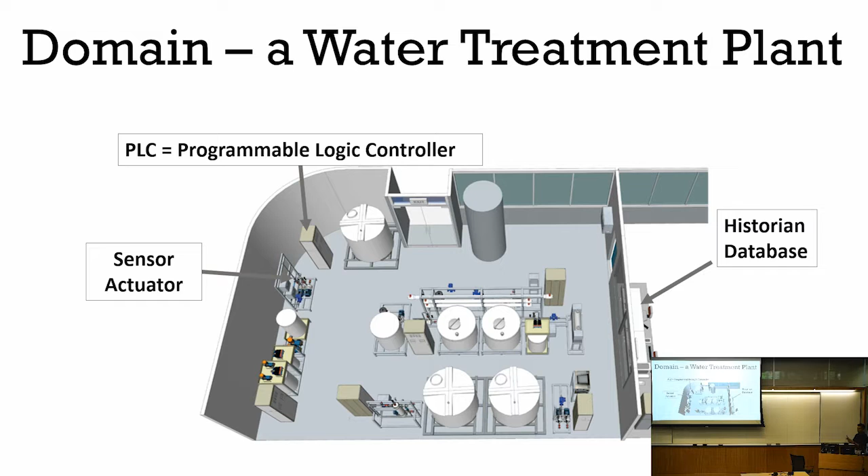So for example, the pump should turn on if the water level is low. This is a sequential style of programming called ladder logic, in which every step has to happen in sequence. So these things control sensors and actuators. They get the data from the sensors, they estimate the state of the plant, then they control the processes using the actuators. So the architecture is somewhat like this.

You have a physical process which is estimated by the sensor. Then the PLC reads the sensor readings, then the PLC tells the actuator what to do, and it impacts the physical process. So the good thing about these PLCs is that they're localized to the stage in which they operate.

So if you have 6 stages, let's say ultrafiltration, dechlorination, and all these different stages in a water plant, every stage will have its own local computer deciding its own local actions. All of these computers are connected to a centralized computer called the Supervisory Control and Data Acquisition Unit, or the SCADA system. So these blue stars indicate that all of these points are prone to attack.

So what we did at the lab is we put defense mechanisms at each of these points. One of the things I'll be demonstrating is how to visualize defense and how to visualize attacks. So for example, these are the electrical wires that go from the sensors to the PLC.

So we went a step ahead of all the things that are out in the industry, and we captured the electrical current and voltage signals, and we assumed that a hacker cannot get to the electrical and voltage signals part because they typically focus on the network part. They get in through the network. So we capture data from all these different levels, and we have the most accurate state of the plant.

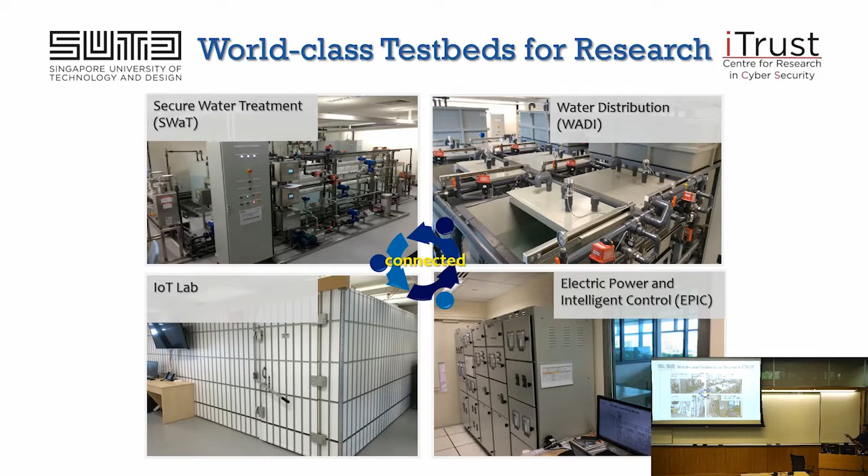So I'm just coming from Kansas City in the Department of Homeland Security's conference on industrial control systems. They are trying to build a similar setup for all 16 critical infrastructure sectors. And like Japan seems to be doing the same thing. We did this about 6 years back.

So we have a lot of collaborations around the world, and some of the best time series data sets that you can get for real physical processes, which many people have requested for, and they use it for testing their control systems methods or formal methods or computer science methods to detect attacks.

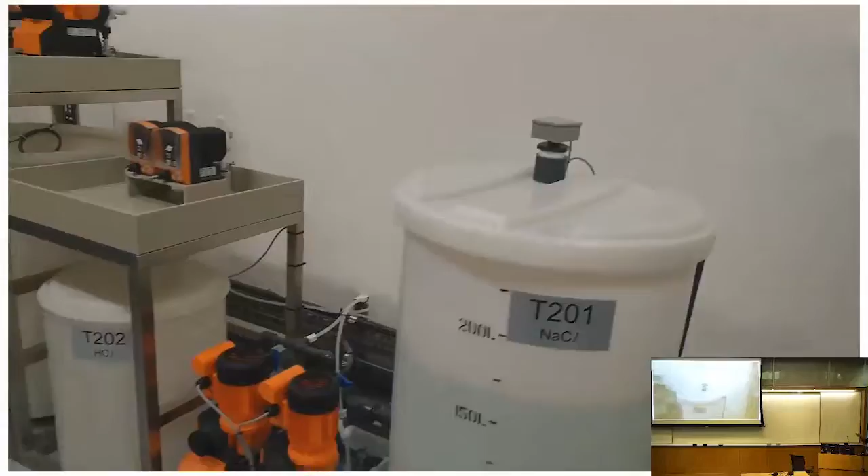So this is just a quick tour of the lab. This is one of the stages. Then you go to the raw water stage. So you can see these are the programmable logic controllers. They are always redundant. Then we have installed different projects at different stages. So you have 6 stages in a room as big as this, and this is just one of the testbeds of the 4 that I showed you.

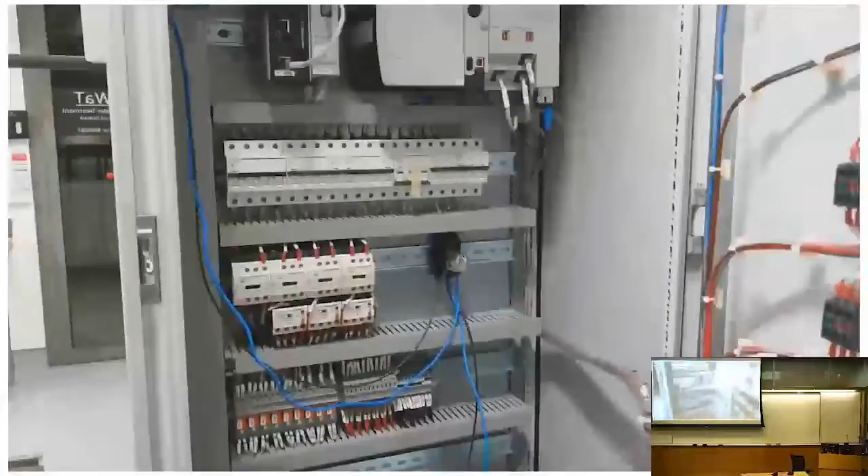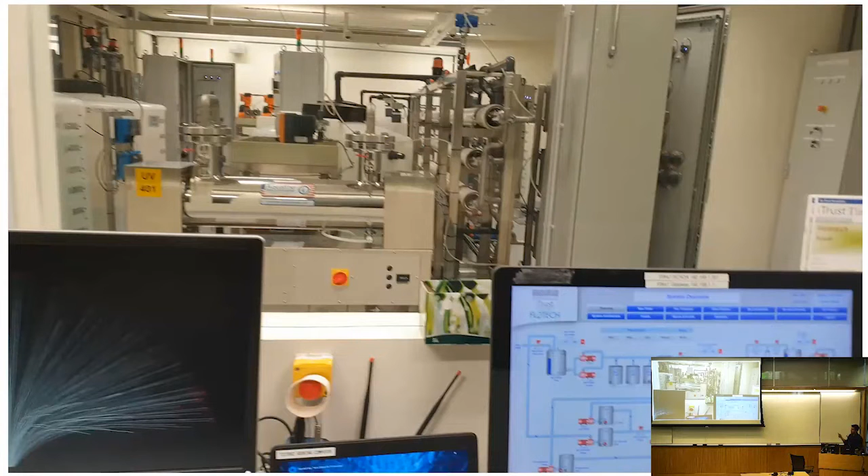And I'll be giving you a closer look very soon. So I want to tell you how the world interacts with this. So you see the screen.

The operator just operates it using a traditional mouse and keyboard or touch screen. And the thing about these interfaces is that they are hard coded by the vendor, and they are frozen at the release time of the plant. So they do not have any way to visualize attacks on the system, or if something is under attack, or any defense mechanisms of the system. All they tell you is the value that the database is seeing. So if that value is corrupted or hacked, then you have no way of telling what state the plant is under.

So what hackers typically do is they get remote desktop access to this particular interface, and that's how they usually attack the plant. So how they achieve that is they send a phishing email to the operator, or they infect their thumb drives with some virus, which is how the Stuxnet attack also happened, if people in this room are aware of that. So now I'll just show you a quick demo.

So what I have here is an Oculus Rift headset. So my position will be tracked by these two sensors here, and I'll have all the degrees of freedom for my hand using these touch controllers.

So you will be seeing a very narrow view of what I will be seeing. So I urge you to try out the demo, because virtual reality is in 360 degrees and 3D, and what you are seeing is a 2D screen with a very narrow field of view. So you won't be appreciating it as you would when you try this headset out.

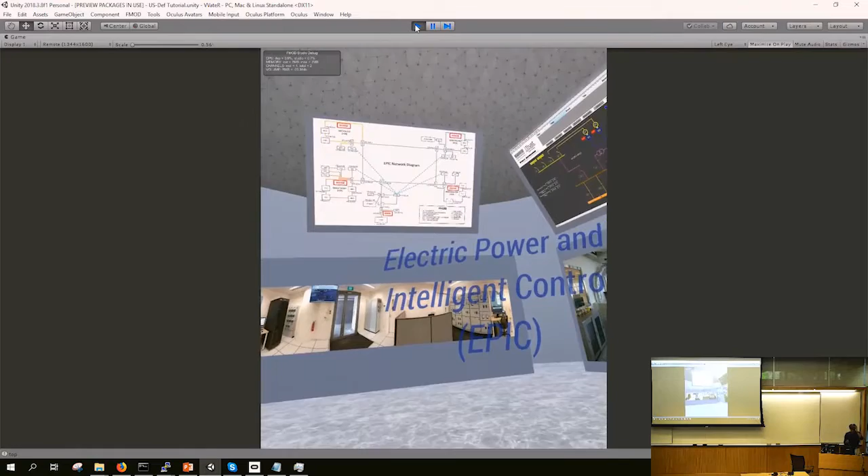Hi, welcome to iTrust. Our research focuses on the development of advanced tools and methodologies to ensure the security and safety of current and future systems in 5 key areas: cyber-physical systems, or CPS, Internet of Things, or IoT systems, enterprise...

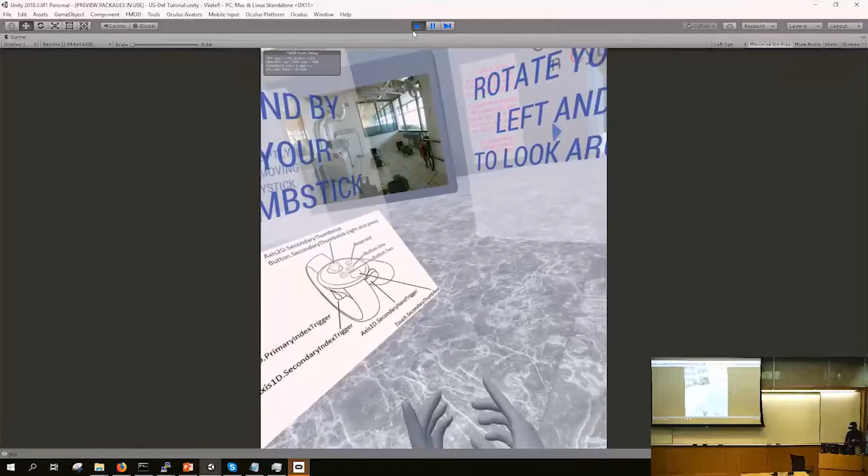Hi, welcome to iTrust. Our research focuses on the development of advanced tools and methodologies to ensure the security and safety of current and future systems in 5 key areas: cyber-physical systems or CPS, Internet of Things or IoT systems, enterprise networks, autonomous vehicles, and blockchain.

So yeah, this is a digital tour of my lab, and this was just an introduction. I'll walk you through my lab. So you see my hands here, and you see that I can make all kinds of gestures here for different actions. So let's just walk through the lab.

We have the following test beds for representing different critical infrastructures: SWaT, Secure Water Treatment Testbed; WADI, Water Distribution; and EPIC, Electric Power and Intelligent Control.

I'm Aditya, and I'll guide you through this entire journey. Follow the blue arrow and complete the objective to move on to the next stage of the tutorial.

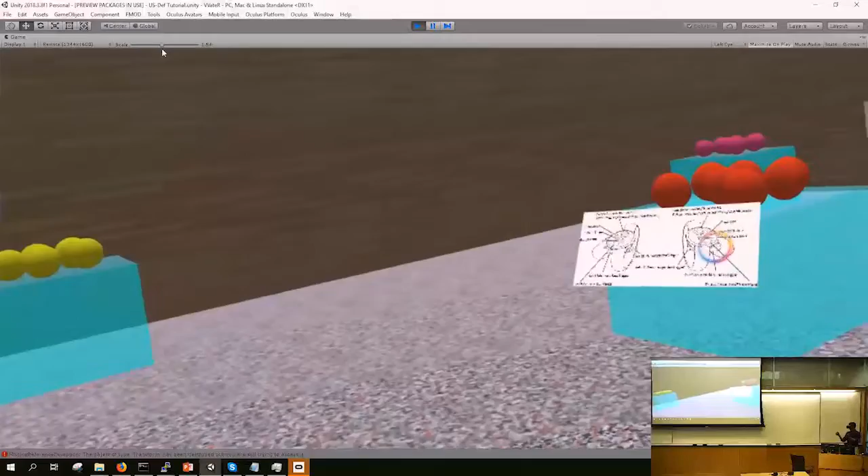So let's start with the different interactions you can perform with your controllers. Follow the signs to complete the objectives.

So this is just a place where people who use VR for the first time can just play and see that we can modify physics as we want. So in this case, we don't have gravity as soon as you touch the ball. So this is just a place to familiarize the person with the virtual reality environment.

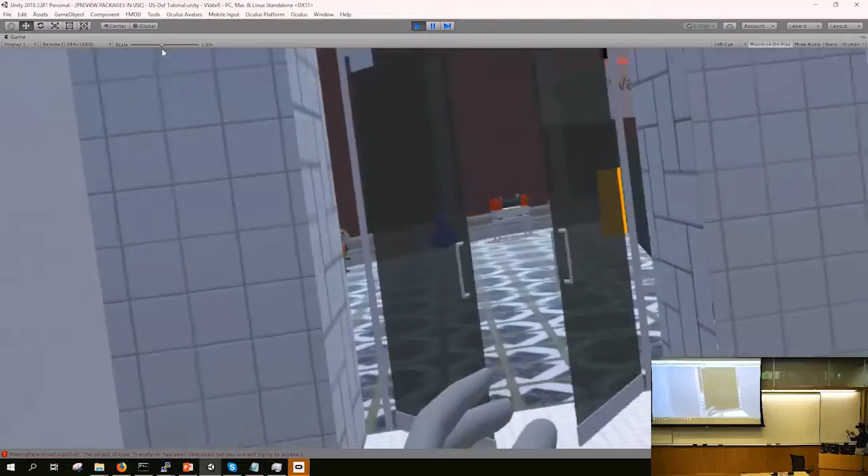Great job! Now let's show you what SWaT looks like. All of these components combine to accomplish individual tasks and hence are divided into stages. Take a good look at them.

So you have all kinds of freedom. So I can move around if I had more space, and you will move around in the VR environment as well. I can squat if I want to, and you can focus on particular components. So these are all the different sensors and actuators we use in the lab.

So the ultraviolet module and the pressure indicator. P1 supply and storage. These are the P2 stages, pre-treatment. P3 ultrafiltration and backwash. P4 dechlorination system. P5 reverse osmosis, or RO. P6 RO permeate transfer, UF backwash and cleaning.

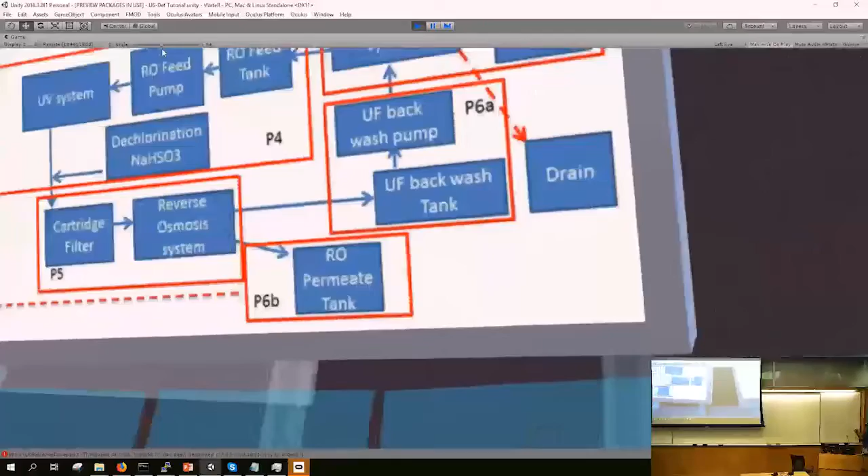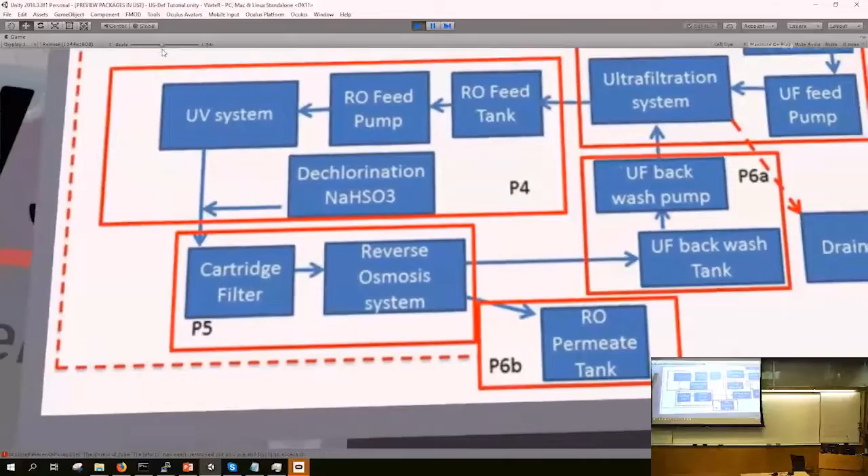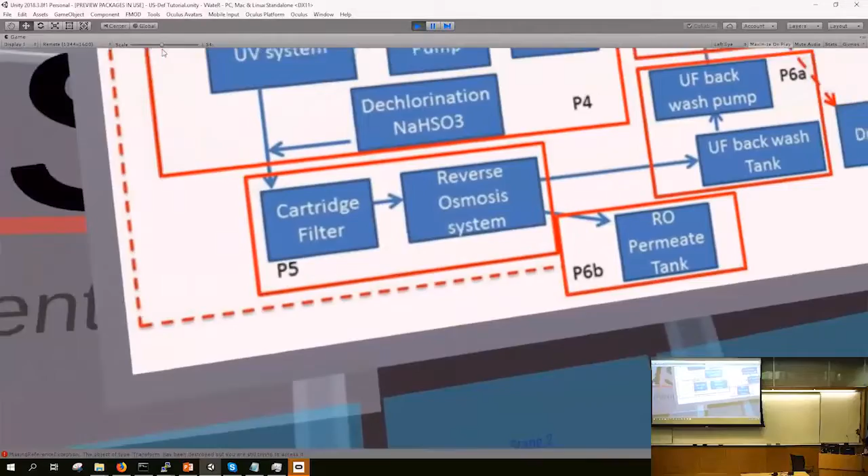So that's the network architecture of the lab. Now SWaT consists of a modern 6-stage process. The process begins by taking in raw water, adding necessary chemicals to it, filtering it via an ultrafiltration or UF system, dechlorinating it using ultraviolet UV lamps, and then feeding it to a reverse osmosis or RO system. A backwash process cleans the membranes in UF using the water produced by RO.

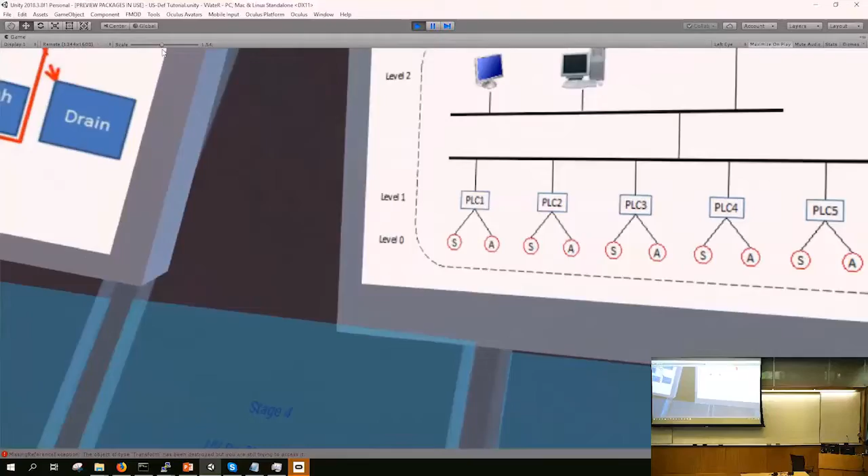The cyber portion of SWaT consists of a layered communications network, programmable logic controllers or PLCs, human-machine interfaces or HMIs, supervisory control and data acquisition or SCADA workstation, and a historian. Data from sensors is available to the SCADA workstation and is recorded at the historian for subsequent analysis.

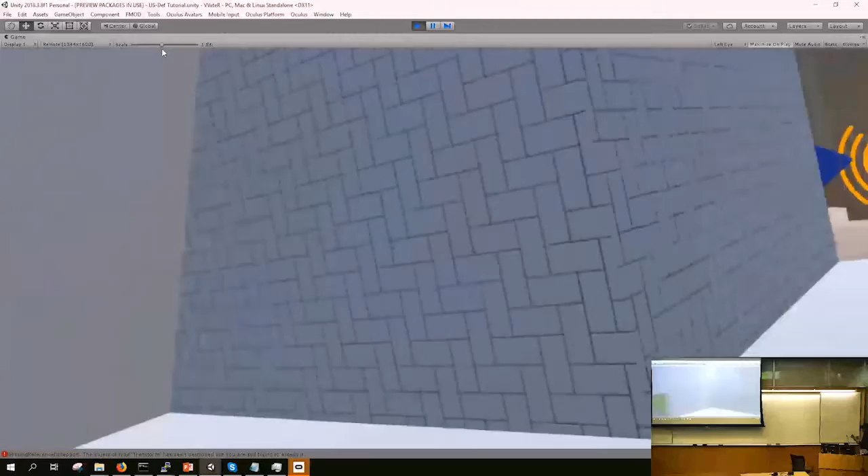Let's get you familiarized with the monitoring screens. Click on the text on the green screen using your hand, mouse or laser pointer to obtain values for the components. This shows that you can work with a virtual environment in the same way as a real environment, just like touchscreen panels in the lab. This enables a lot of applications such as remote teleoperation. You don't even need to be in the lab to work on the lab, and that's what we'll see in this demo.

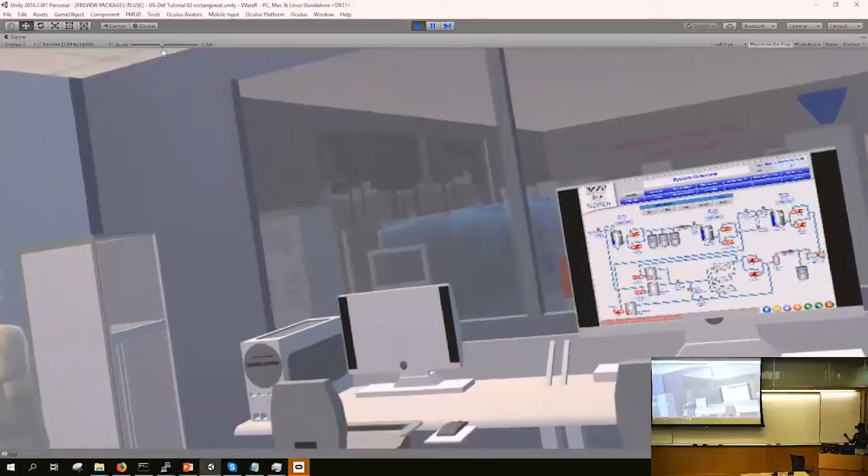Look around you and enter the simulated SWaT by the door. If you visit my lab in Singapore, this is part of what you will see. That space is where the SCADA and historian is managed from.

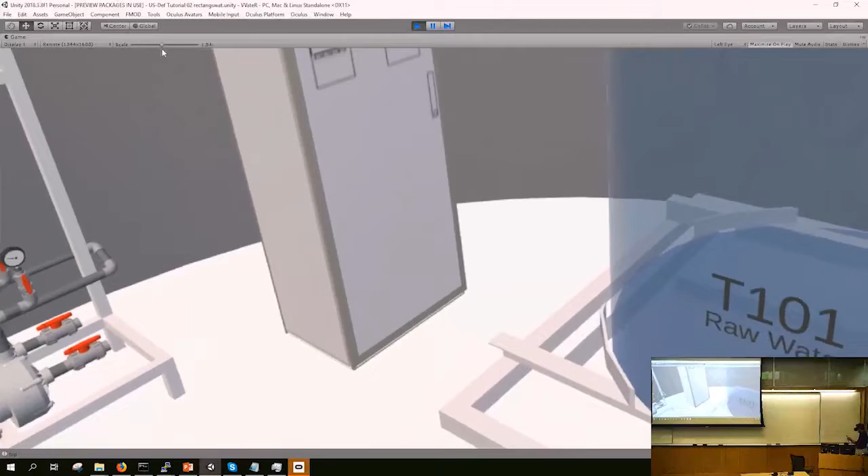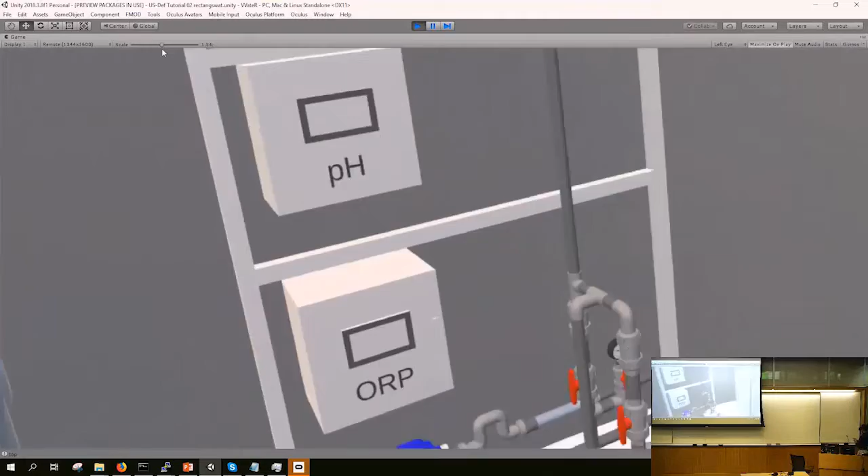These are the stages. Stage 1 is called the raw water processing stage. Raw water is stored in tank T101. Water comes into tank T101 through the motorized valve behind the tank. Water flows out of this tank to stage 2 through the constant speed pump below. These two AIT indicators indicate the pH level and the oxidation reduction potential, or ORP, of the raw water.

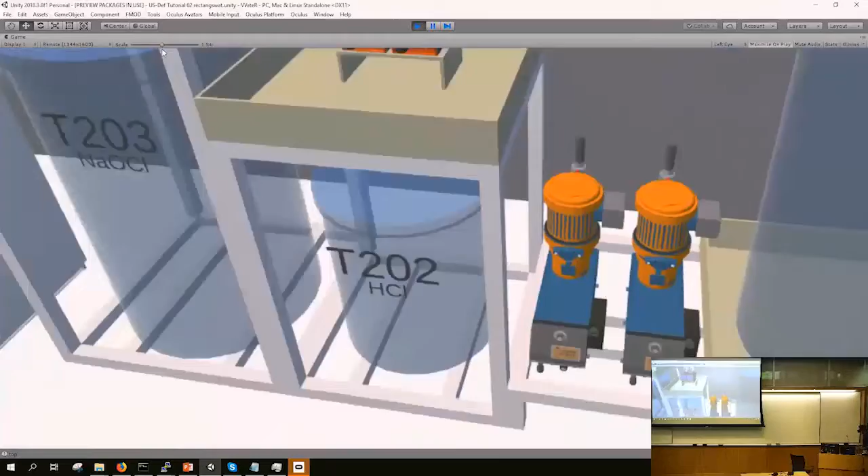In stage 2, called the chemical dosing or pre-treatment stage, appropriate levels of 3 chemicals are added to the raw water: hydrochloric acid (HCl), sodium chloride (NaCl), and sodium hypochlorite (NaOCl) for disinfection. I'll skip this part because pH and ORP balancing is very plant specific. If you are in the water industry, these are dual dosing pumps to control the flow of the chemicals.

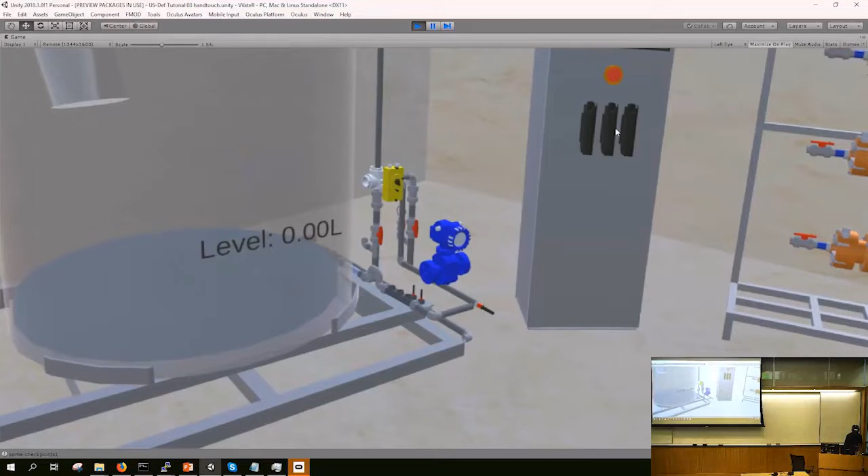I'll just focus on the generic parts. This is stage 3, the ultrafiltration stage. This pump will move the water from tank T301 through this UF or ultrafiltration unit to tank T401. The UF unit contains micrometer membranes to remove solid matter from incoming water. This stage contains a number of motorized valves.

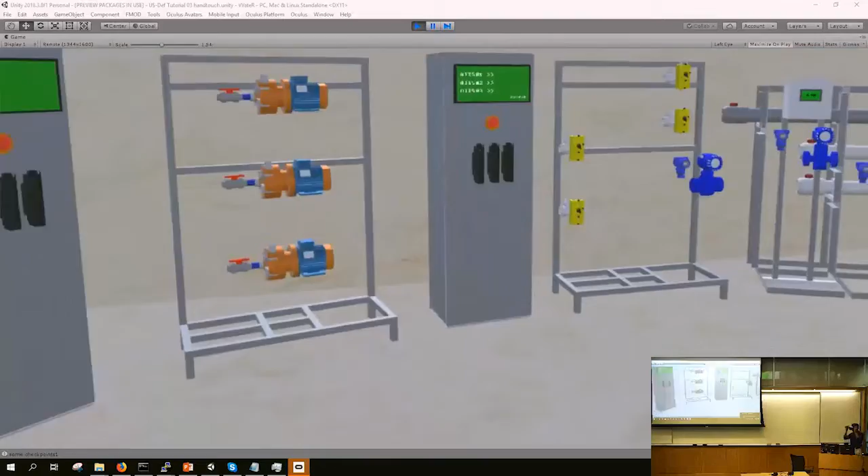One of the things that virtual reality offers us is that we can redesign the environment as we want. So it doesn't have to be a cluttered lab layout like you just saw. What we did was we laid out the lab again by redesigning it in a very accessible fashion.

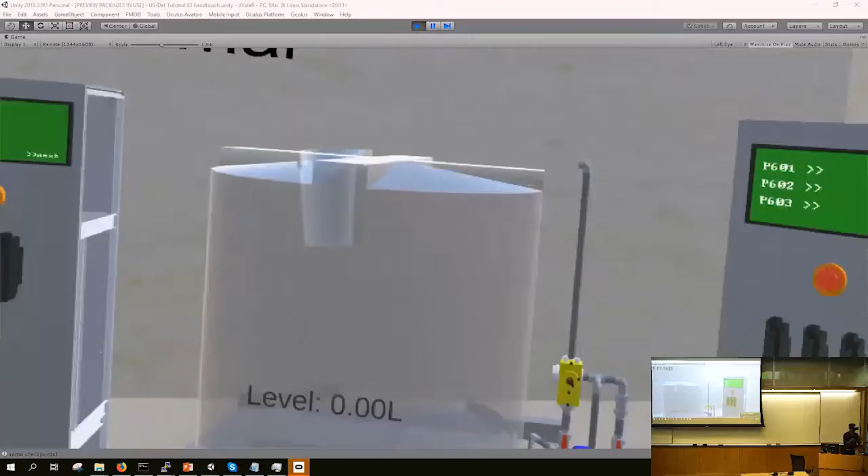So this is stage 4, stage 5, stage 6, and back to stage 1. This helps us in visualizing a lot of things, which I will show you. You get more context about the plant because you can add as many assets as you want.

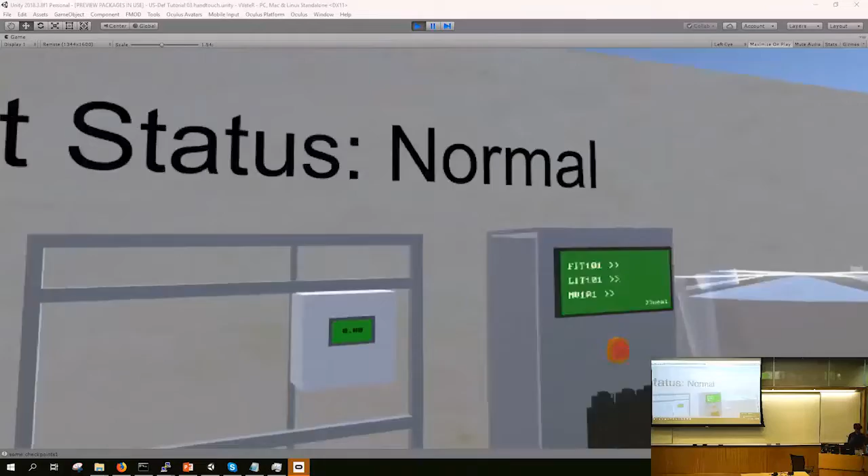I'll show you one of the applications that we developed. Instead of, after a cyber attack happens, the operator having to go through the database logs and figure out what went wrong at what step, which is a very tedious process, what we did was we made that process visual.

So you can see the plant breathing, you can see the plant moving up and down at a speed which is not natural for the plant. Water is a very slow process, like water moves up and down very slowly. So if we speed that process up, we can see how the plant is behaving, like at what point the pump turned on, at what point which valve closed.

I'll just open an 11-day data set that I'll play at a very fast speed. So you can visualize 11 days in a few minutes. 7 of those 11 days were normal operation and 4 days were attacks. We can see both cases when the plant starts reading the data set.

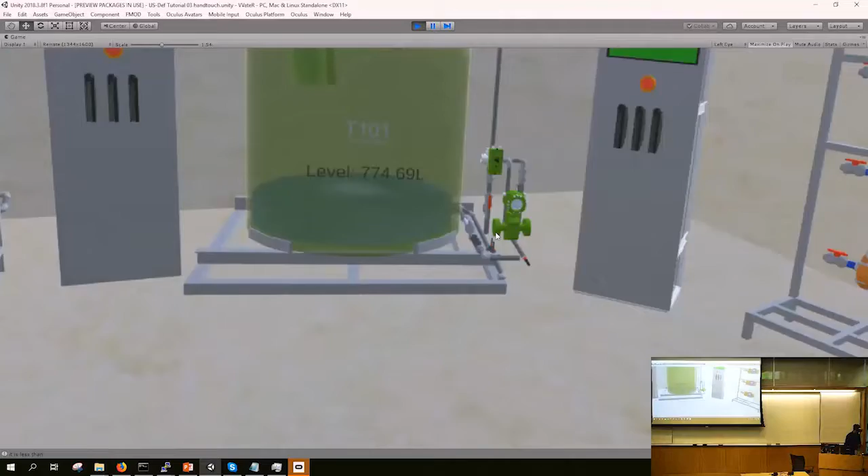So anytime now it will just start. So yeah, you can see the plant breathing. If there's an attack, it will show it as an attack, and if there's a particular component which is attacked, it will turn red.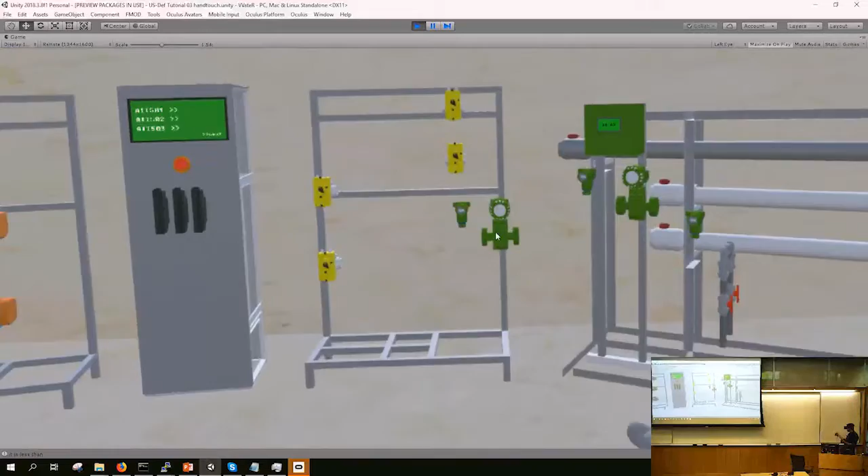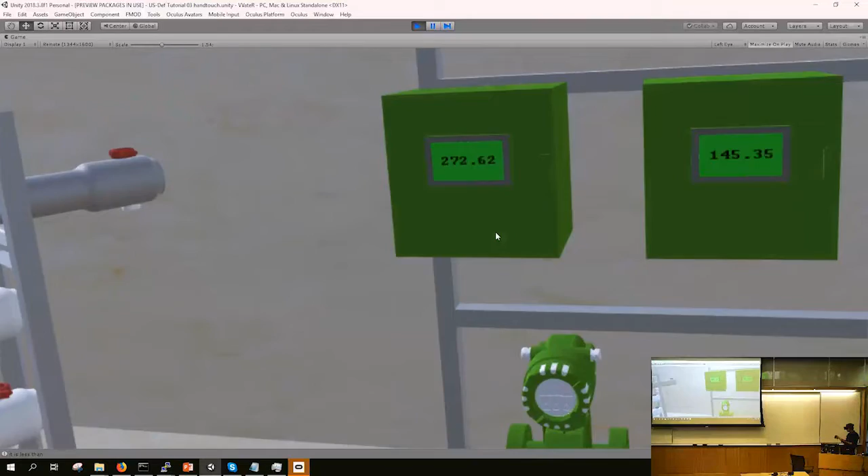And you can see the plant moving, you can see the different parts like the pumps. If these things are green, that means the pumps are pumping water to it, and that's why the levels might be increasing or decreasing in a particular stage. You see all these values changing, which are the different sensor values. You can interact with the touchscreen panels in the same way you would do in a real plant.

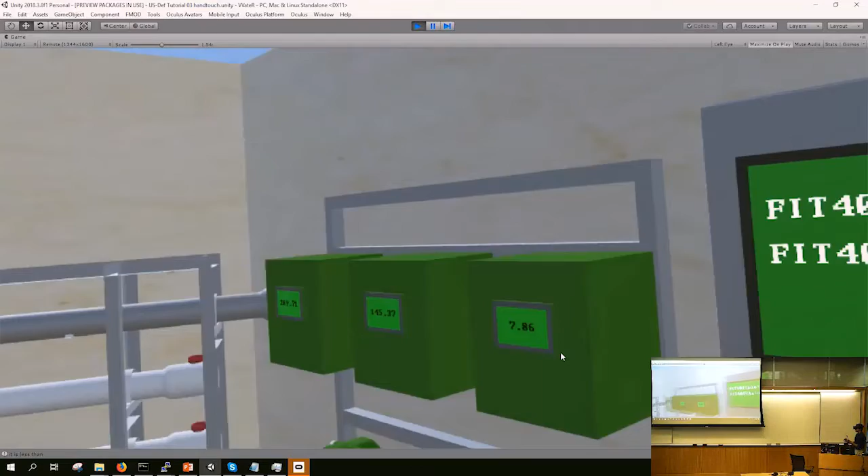So the reason you see two values here is the same architecture I showed you earlier. The PLC is the reflected value of the plant, which may be hacked. We developed a project called IC, or Intelligent Checkers, in which we distribute our detection mechanism across the plant and measure all the values to see the actual value of each component in the plant.

LIT means the level sensor, and you can see that both these levels are the same. You can see the water going up and down, and if it's a critical attack, you can alert the plant operator accordingly.

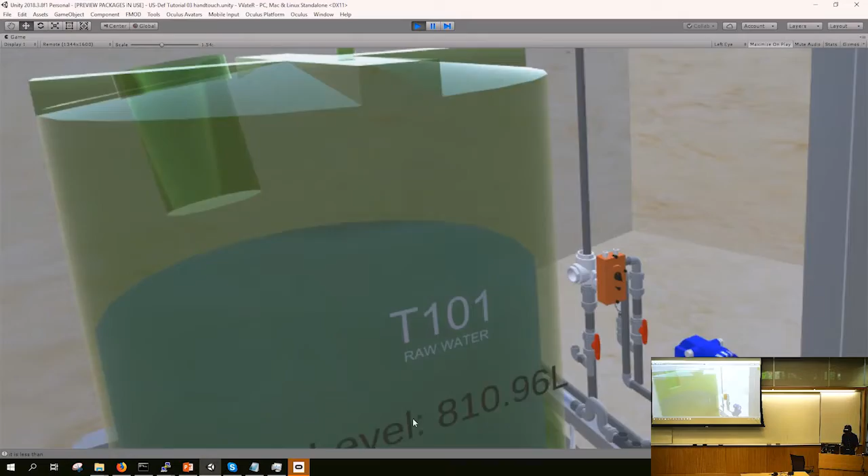And if you want to slow down the rate of this data transfer, because water doesn't really move up and down this fast, you can do that. If you look at the time lapse rate, it says fastest, so now I'll slow it down a bit. Now you see it takes 0.3 seconds for every step of the data set, moving very slowly, which is closer to the real situation in the plant.

So in case there is an attack, you can freeze and analyze the situation of the plant and see what went wrong, which part was attacked by the attacker first, and do all those kinds of analysis, which is important for recon.

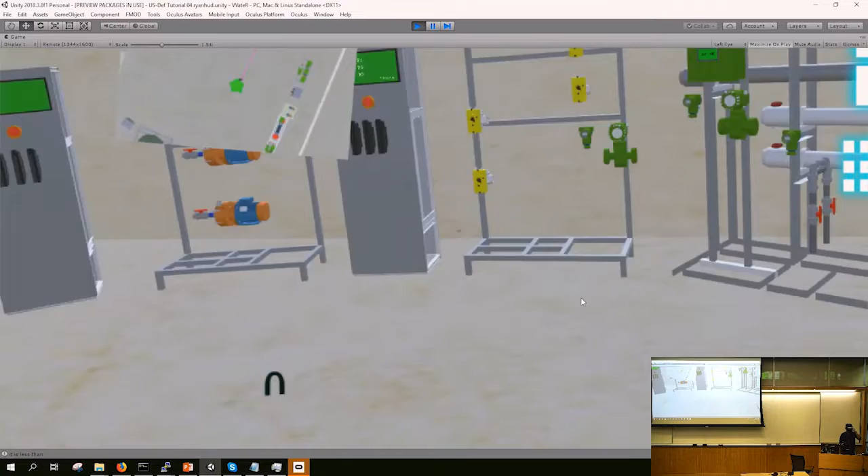So we did not stop at this. We further redesigned the plant and added a heads-up display, which you see very partially here. So what I'm seeing is something closer to this.

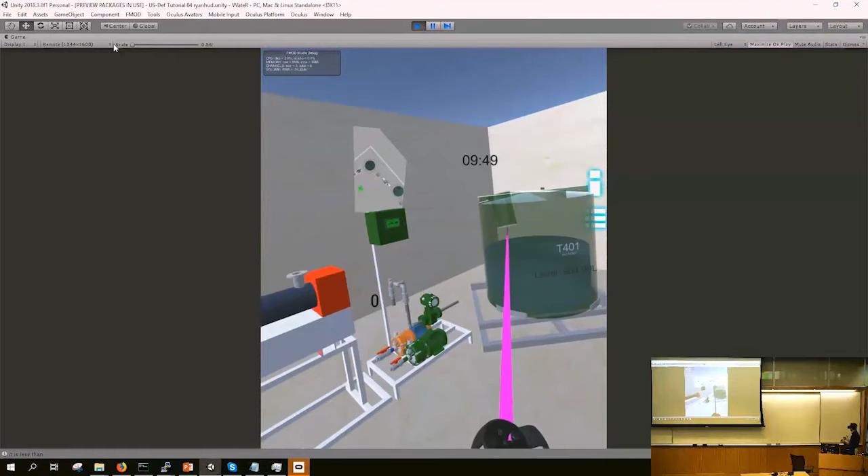So you see all these different components, and now I have a laser pointer instead of my hands, and you can see my controllers. You have a mini map here, which shows you the location of your character in the plant. This is a small plant, but when we extend this to a real world plant, these are huge plants across multiple rooms, so you need to know what went wrong where.

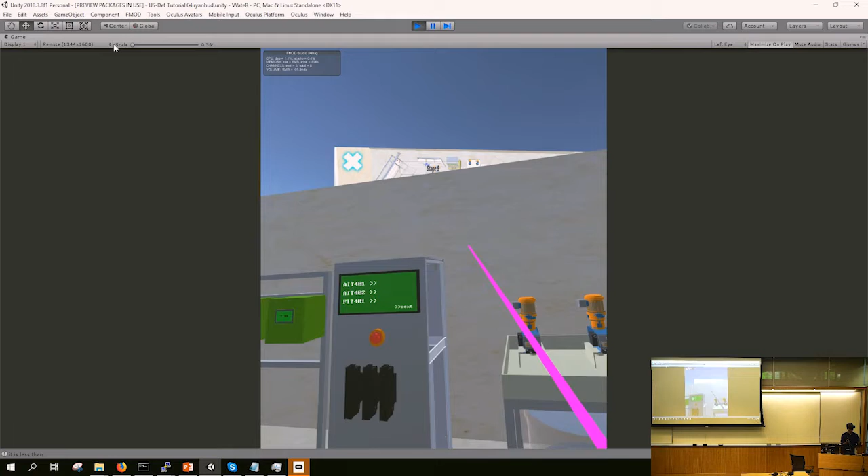You can teleport to any particular stage in the plant just by focusing on it. I just clicked on stage 4 and was teleported to stage 4. So stage 6 - if there's an attack here, you can just go directly to that stage and see what's wrong in that particular stage.

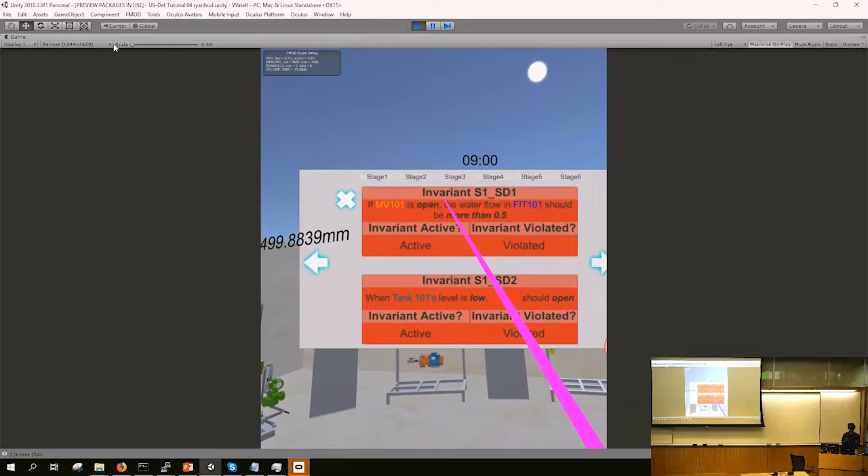Then we have different detection mechanisms. This might be of interest to people here because it's physics based. Invariants are physical conditions which must be true. The idea of this detection mechanism is that the attacker can fool the plant in whatever way they want, but they cannot fool the physics of the system. They cannot make water go at a rate that's more than what gravity allows it to go. So we have these conditions that we derived both using formal methods as well as machine learning.

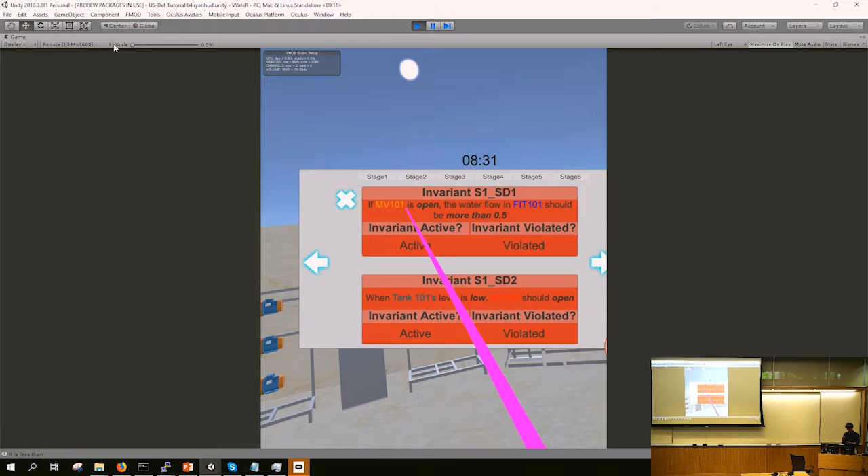That's another project that I want to visualize through this virtual reality environment. What this says is if the motorized valve is open, then the water flow in the flow indicator should be more than 0.5. If it's violated, it turns red, and that's what this is trying to show.

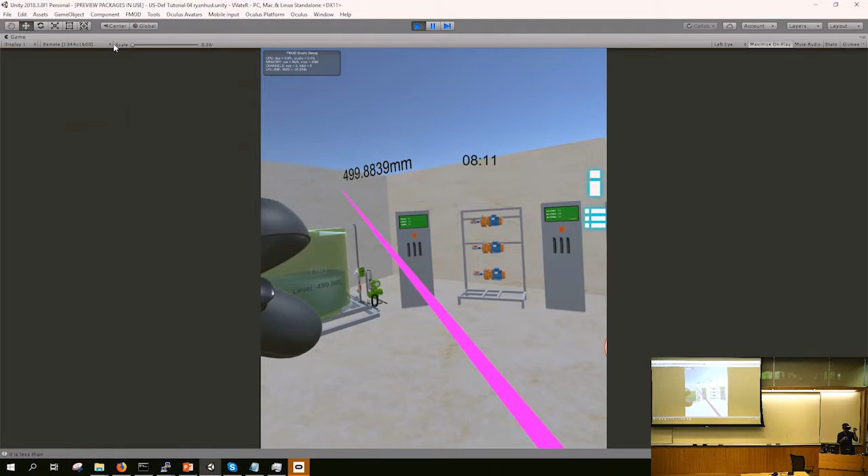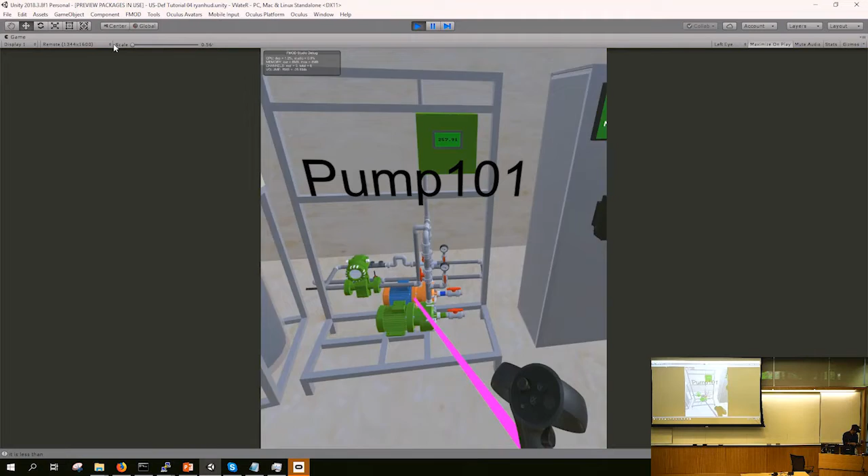We can also see a summary of the different things happening in the plant. It's an easier way to access what's happening at each of those stages. So pump 101 is on, which is true, you can see it's green. And pump 102, which is behind it, is off, which you can see is not green, so that's why it says 1, which is the code for off.

Now I'll try to connect to my lab's VPN, and if it connects successfully, we can access the plant live through a virtual reality environment.

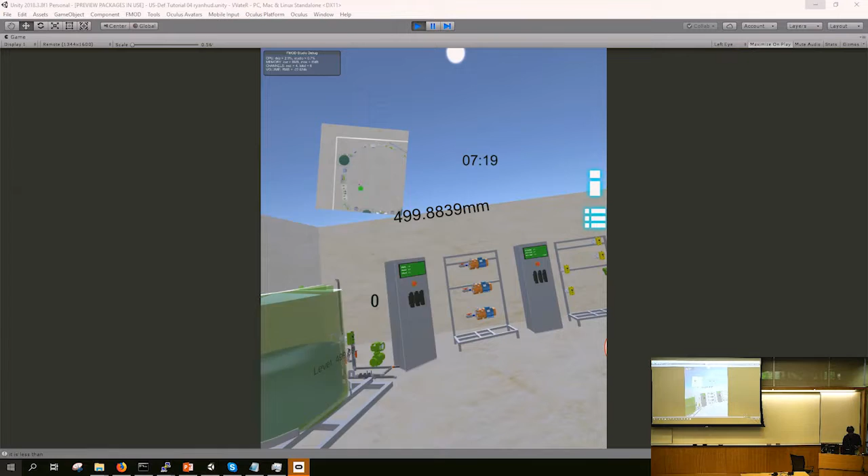And I'll invite one of my lab members to show you around the lab.

So usually how this demo goes is I connect my lab through the VPN, and then we do attacks here, which you can visualize here. Someone does an attack there, which you can visualize in this environment. Salima is a researcher at the lab with me, and it's, I guess, 7:30 a.m. in Singapore, so she'll just walk you through SWaT.

So can you go inside SWaT? She's in the control room right now - go inside, she's in the room next to the testbed. She'll just show you the different parts of the testbed, and she'll do a live attack there. She has developed an attack tool in which we work with vendors to attack the plant in whatever way we want, like man-in-the-middle attacks, network-based attacks, or physical layer attacks. So we use the virtual reality bit to demonstrate and visualize those attacks.

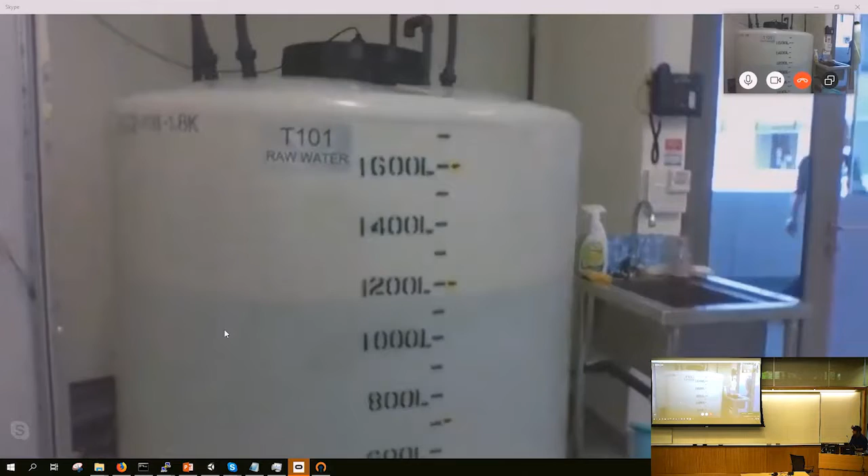So what you see here is stage 6. Salima can change it, so you can see the value in stage 1. Can you focus on stage 1? LIT 101, you can see that, the water level. I want to show them the water level - you can see it's close to 1100 right now.

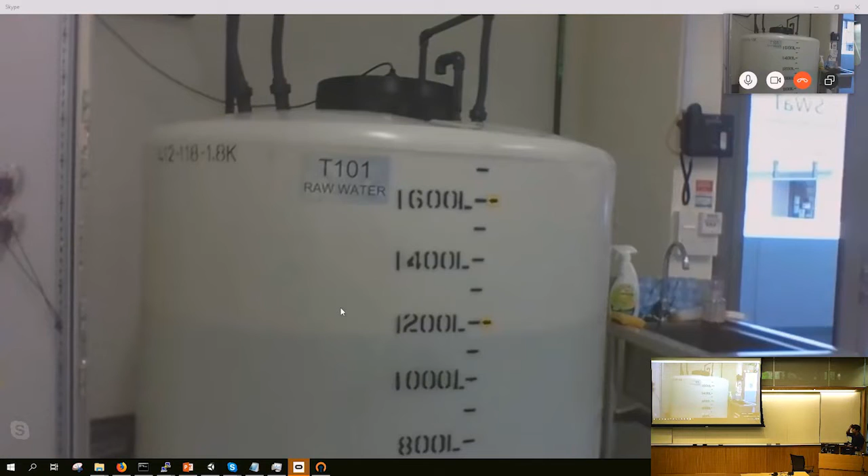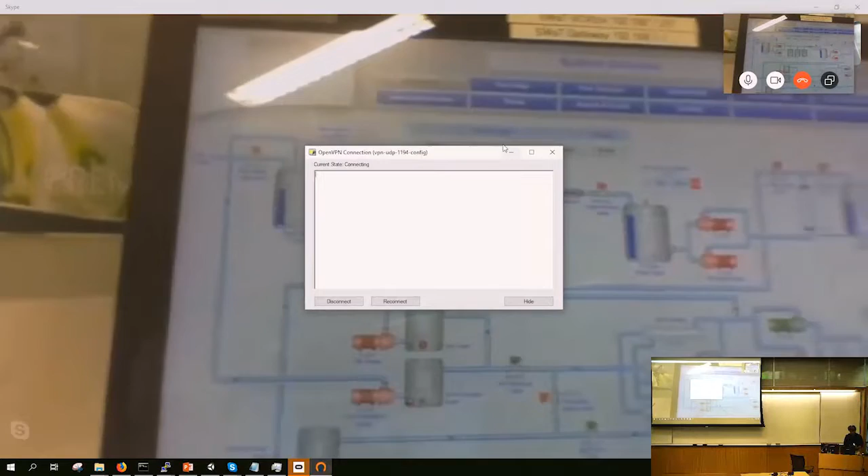Now she can change it to some other value using the interface that I showed you. Salima, can you modify it to 200? All right, let me go back to the main room. You can do it from the touch screen there. Okay, it's open, so no problem - just focus on the monitor. Can you see it? It says around 1100, and she can modify it to be 200.

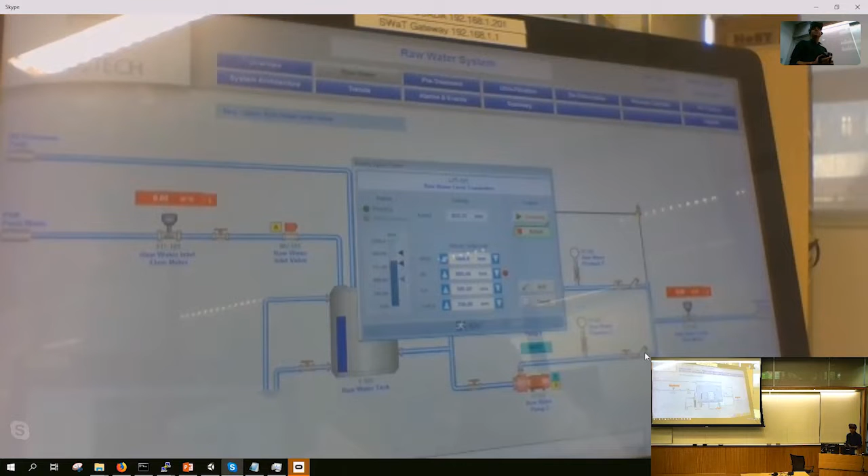So this is one way the plants are attacked. There's a disgruntled employee or an insider who just wants to mess with the plant. They still have their credentials after they are fired, so they can remote desktop access to it and modify it as they want.

We can also do network-based attacks, like using Python scripts.

So what she's trying to do is made it 200, I think, not yet. I can't change it because the other tank is high. So I'll change tank 3 to 200. Is that okay? Yeah, okay.

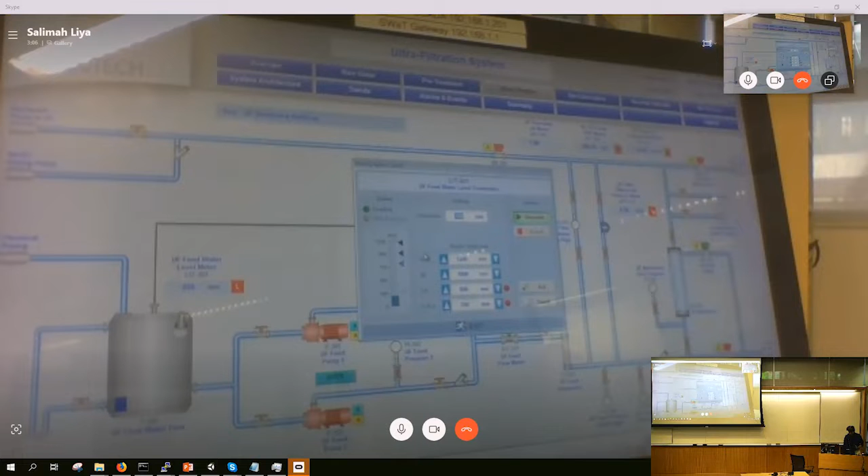Can you launch an attack from your computer using PyCom? I have to set it up because I need Wi-Fi. Okay, no problem. So if the VPN was working, you would see this environment, the same values, and see what thing is being attacked at what point. You can do an attack here, which she can show there, and vice versa.

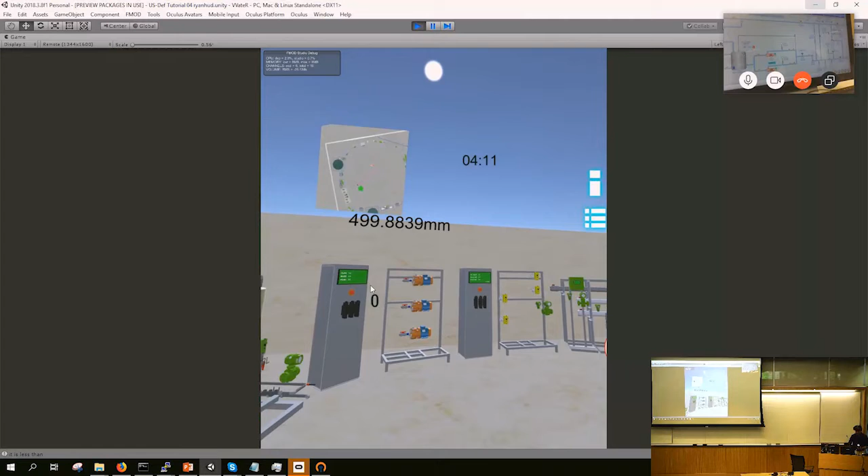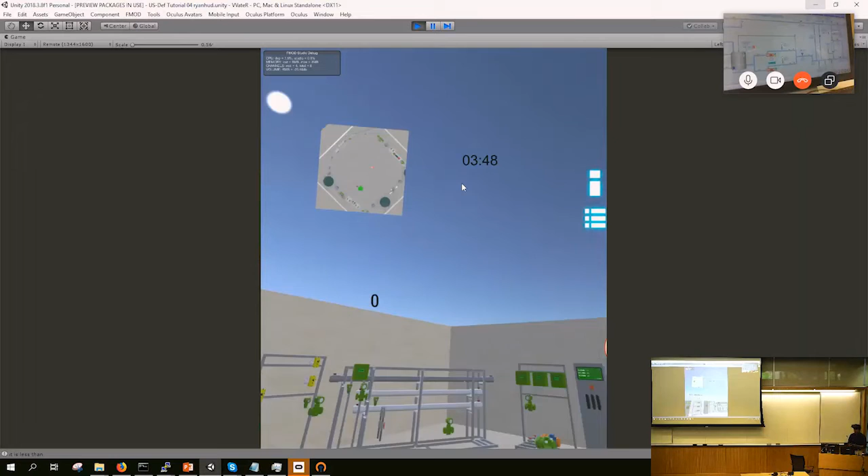So the idea is that a technology like this enables teleoperation. Maybe your factory doesn't have skilled workers to work on the 30-year-old PLC that you have, so you can outsource it to some other country's skilled labor who can guide you through the virtual reality environment, and they can guide the lesser skilled person in their country to modify the plant, because VR enables you to spatially move around and interact with things. So things which require you to turn, rotate, and work with objects in 3D space, virtual reality helps you do that, easily, with just a network connection.

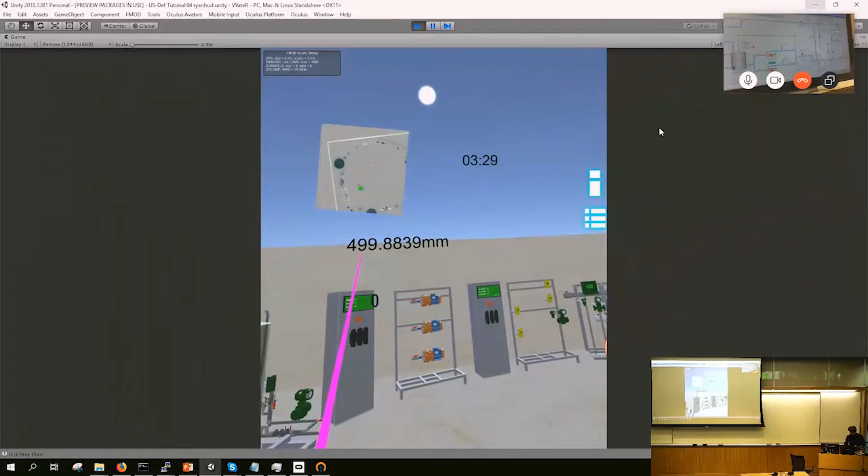So while she sets it up, I'll continue with the rest of the presentation.

So this is also being used by the water companies in Singapore. We are working with the main water company and soon power companies of Singapore for training purposes as well. This is used to show new employees how the plant works, and you can give them short quizzes while they are walking through the plant to see how much of the plant they know.

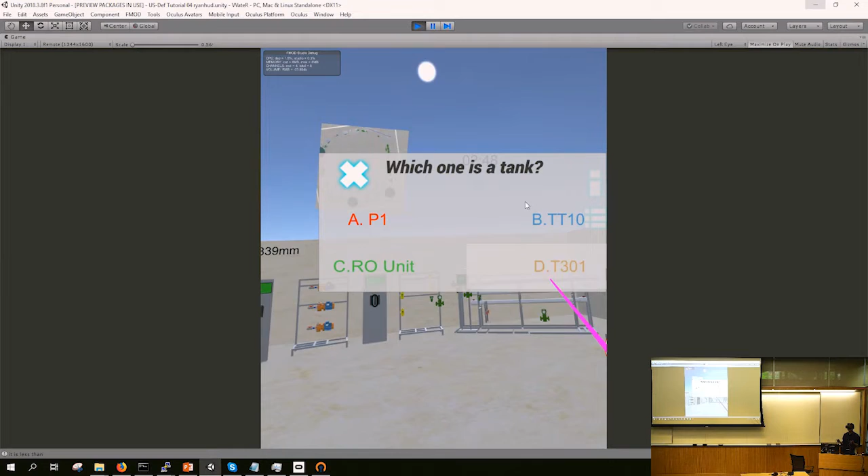So the US Navy already uses such a system for training their new recruits on submarines even before they enter the submarine. You can just answer all these questions and see how much you have grasped about the plant.

So you can use this for training purposes, which is one of the main applications of VR these days. All the companies use it commercially for training purposes. Now I'll continue with the rest of the presentation. There's another demo soon on another topic, so stay tuned for that.

So this project is just a 7-month-old project with just 3 undergrad students, the professor, and me. It has got a lot of recognition since then. It got an award by the equivalent of Y Combinator in Singapore, a startup accelerator that found this project worthy enough for an award. We had the US Navy head of research visit our lab to see the different technologies we have built at the lab.

You can see my lab director showing it to the US Navy head of research. Then this was one of the highest profile visits that we got, which happened during one of the summits in Singapore. The president of Chile visited our lab, and he actually wore the headset and conducted live attacks on the plant. That was a pretty big thing for us.

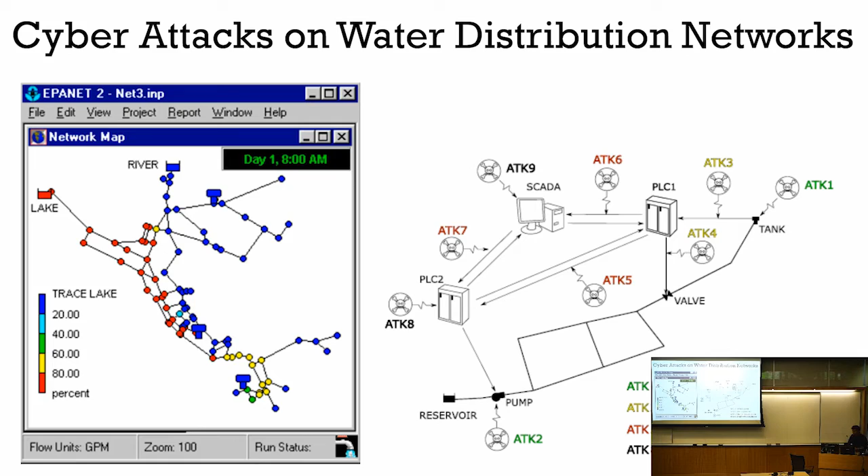So what we did is we took one of the tools developed by the Environmental Protection Agency here called EPANET. EPANET can help you simulate water distribution networks very well, so it's a simulator. And what my lab did is they added a cyber physical attack portion to it, so you can have digital components and affect the distribution in various ways. This also got the best paper award at the top US conference very recently.

So we connected this simulator to our virtual reality, to one of the mini games that we developed. I'll just show you that, through my Oculus Rift, and there's a video as well.

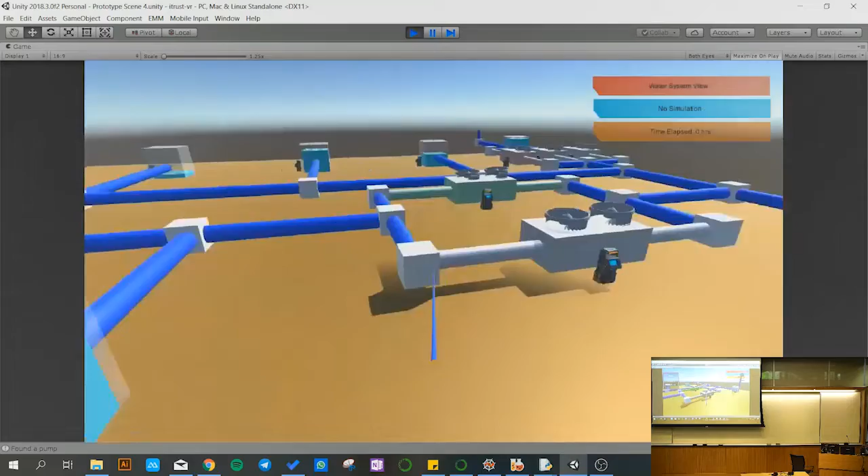So what you see is a city, and with just a click of the button you can see the water grid portion of that city. You can see how the city functions, like which tanks are being operated at what time, which pumps are on, and you can see the correlation between the tank and the city in the city's water grids.

So this is one of the attack scenarios that we have. There's a distributed denial of service attack. An attacker has affected multiple PLCs. So you have to go and stop the attack as the person who manages security in the city.

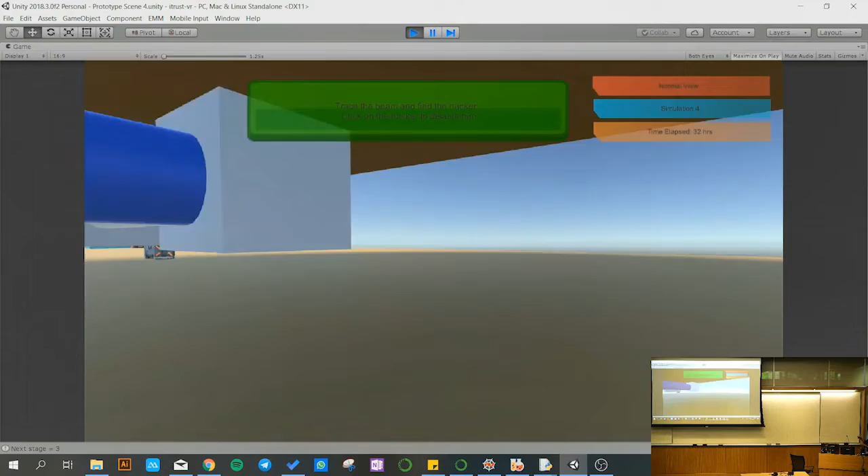First you will focus on the water layer because that's where the attack has happened first, so your physical component has been affected, and you have to go and manually check that. Then because it's originating from a cyber point in the city, you have to trace the attacker and see at which point that attacker is in the city. You see that the cyber attack is coming from somewhere there in the city, so you try to go to that physical location and trace the attacker down.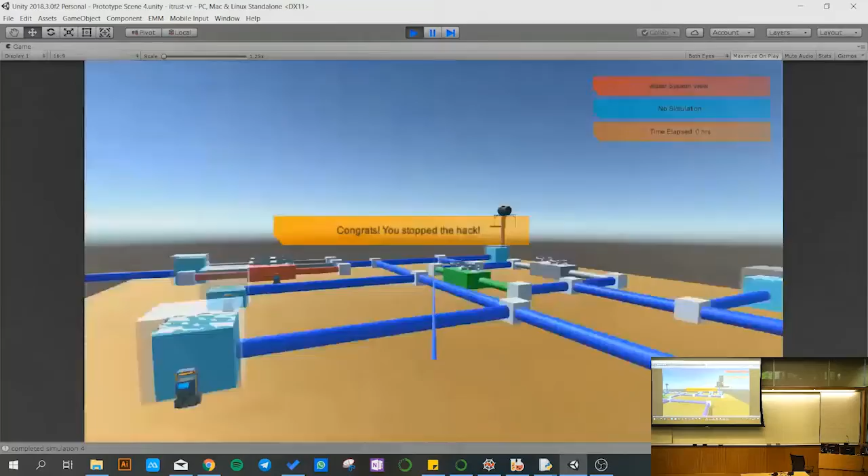So you stop the distributed denial of service attack, and now we will see the negative demonstration in which we are unable to stop the attack, and we'll see the consequences of that.

So now this is a realistic scenario, because the speed at which these attacks happen, it's mostly too late to do anything about it. So we are unable to guess what's happening. We're just trying to see where the attacker is and failing at it.

So you see the similarity between the tank in the city and the water grid. Because we are unable to stop the attack, it's overflowing the tank, as you can see. Just with a simple cyber attack, the attacker is able to overflow the tank, and one of the consequences could be this.

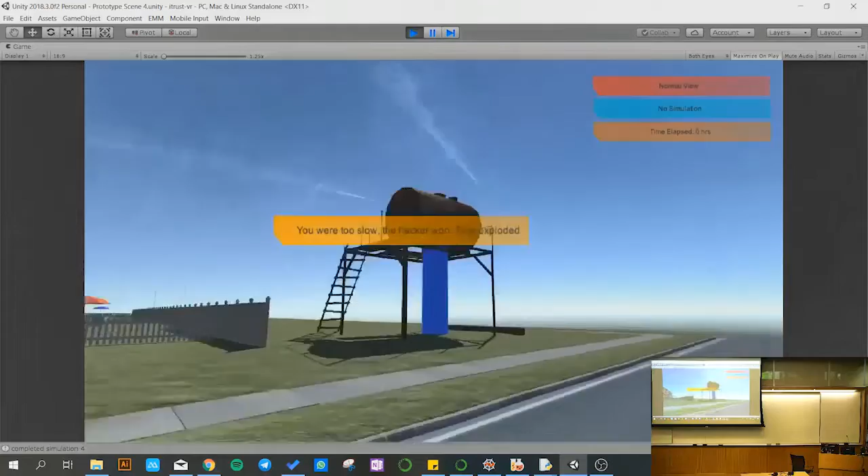So the point of this talk is this is not a fictional scenario. Because it has happened on power grids and transport grids, it can happen to any of the critical infrastructures, and nuclear grids in the case of Stuxnet. So it can affect any of the infrastructures.

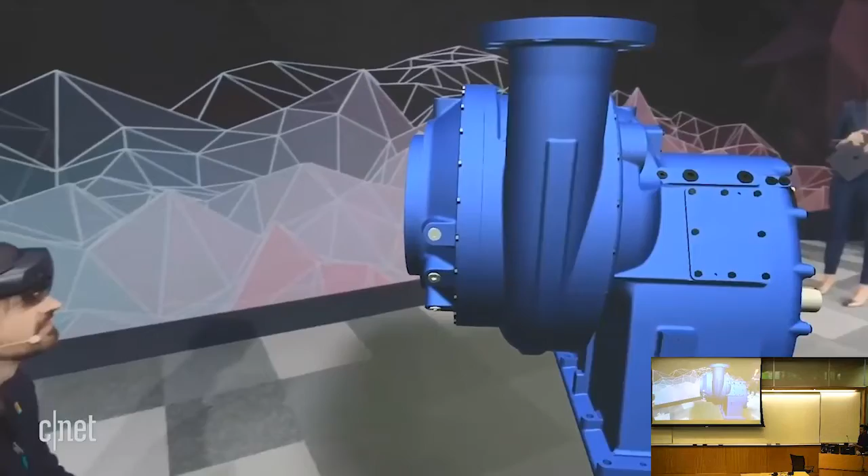Because this talk had a mixed reality component to it as well, the next phase of the project is to use a headset like HoloLens and develop something like the demo that they just showed two months back. This is an augmented mixed reality headset they released very recently, which includes live IoT data streaming in from an actual blower out in the field.

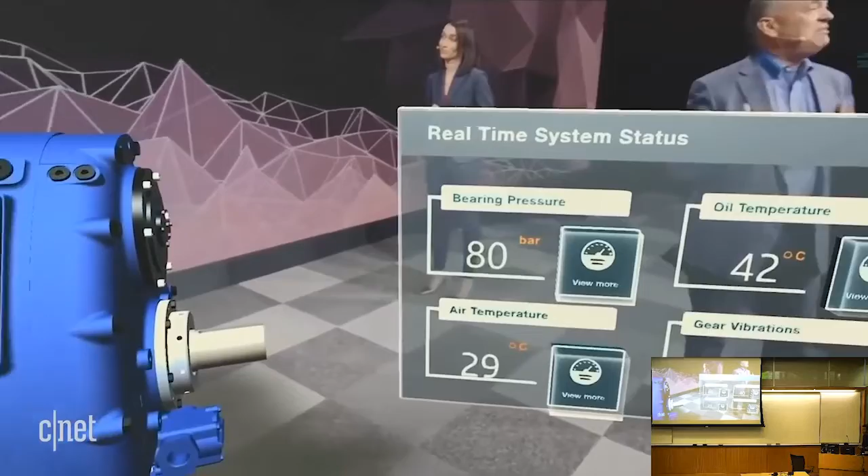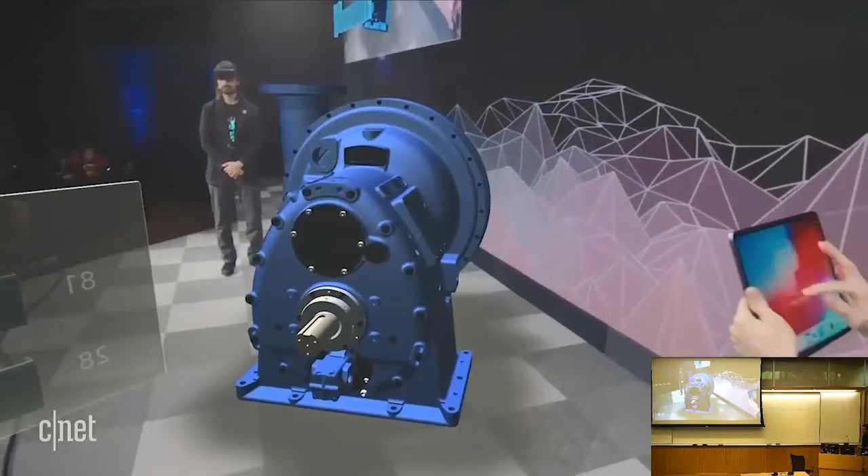While this experience offers significant benefits from a time and cost of training perspective, thus far it's only been geared for individual participation. But now, let's make it more collaborative. By leveraging the Azure Spatial Anchor service within Vuforia Studio and View, we can let Maria seamlessly join in Alex's experience. Maria can simply take out her iPad and launch Vuforia View. Once Maria points her iPad at the same location where Alex placed the blower, she can participate in the mixed reality experience, making it far more interactive and collaborative.

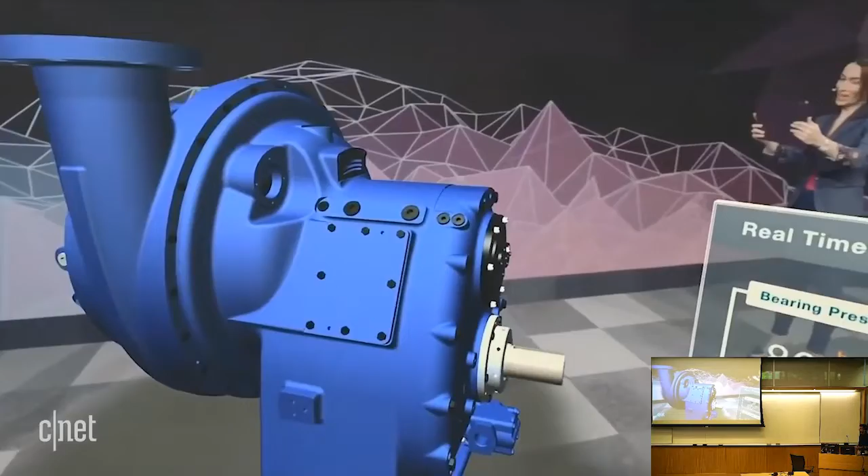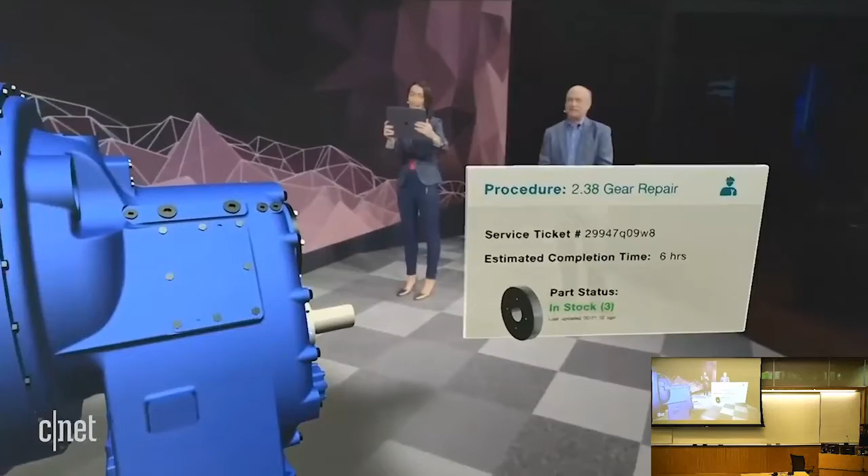That's right, Jim. Now that Alex and I can share the same experience, I can create a number of different training scenarios. Alex, let's simulate a gear failure mode. Uh-oh, I see their gear vibration went up, and I have here threshold exceeded, please inspect. Let's go ahead and select that. Alex, I think you might be dealing with a broken gear tooth, and you will probably have to replace the gear assembly. All right, I'll roll up my sleeves and get some work done here. Let's do it, I'm ready. Right, I'm going to start the disassembly instructions for the gear assembly.

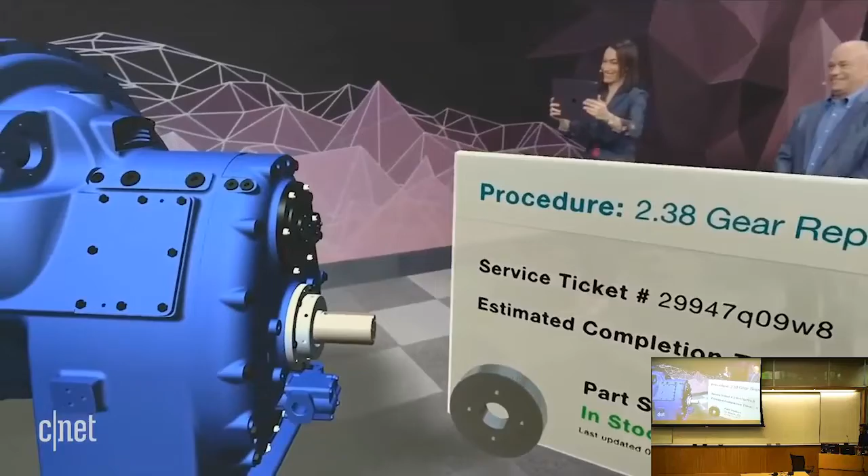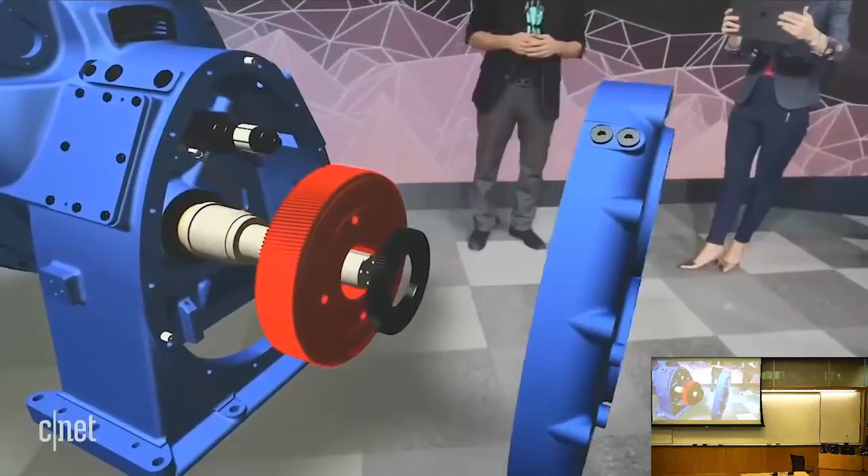So these people don't have to be in the same physical location, they can be in geographically different places. Now that Alex is using HoloLens 2, he has access to a wide range of hand and eye tracking capabilities that are all available in Vuforia Studio and View.

All right, let's put it back. That is so awesome. Fantastic.

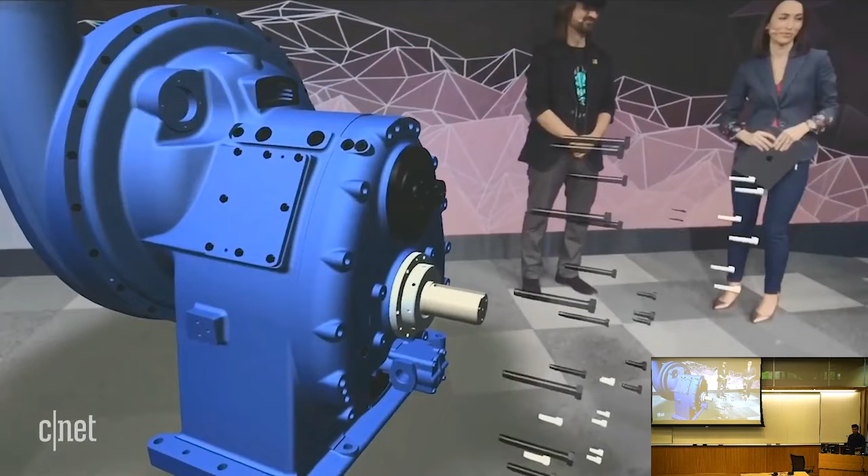Vuforia Studio. So as we get more and more sensors in our plants, we can develop applications like these and use it for asset maintenance, and see which of the parts of the plant have degraded in quality over their lifetime, and replace them right from your virtual reality environment.

So before I summarize the talk, I'll just walk you through the lab again.

We saw that such an environment can be used for simulation training for operation and maintenance staff. You can walk them through the plant even before it's built and train them on different scenarios in the plant.

You can have a very distraction-free interface. What typically happens in these plants is you have 20 screens and the operator always misses the true positive signal when an attack is happening. Because of such information overload, it's important to design better interfaces with a very focused view on which attack is happening at what point, or which malfunction is happening at which component.

You cannot really look in the real world unless you remove the headset. So once these headsets get comfortable, it can be a replacement for monitor-based interfaces.

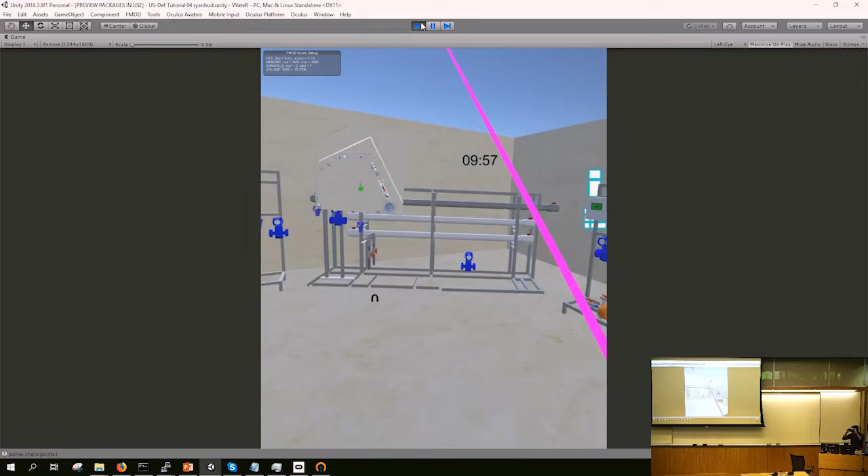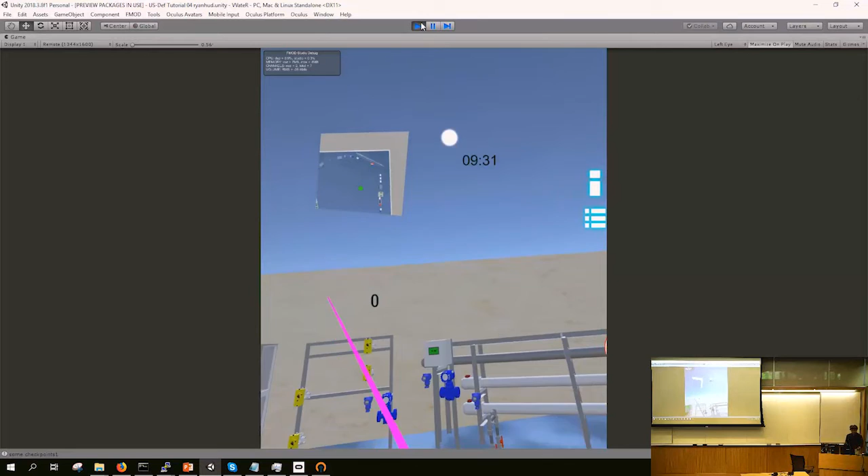So in case an attack happens, your environment can tell you it's about to flood even before it's flooding. And if you think this is a fictional scenario, we have flooded our own lab on two occasions. So we know it's very much possible, and that's why it's a test bed — we can afford to make these mistakes, but you cannot do this in a government-owned water plant or nuclear grid.

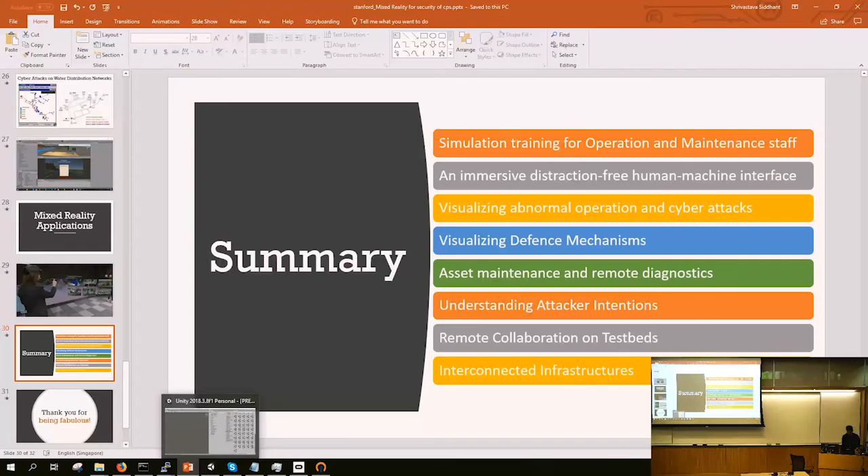That's why we need better security techniques to detect these attacks, which is why the research and these visualization tools come into picture.

We saw that we can visualize defense mechanisms. We can see which parts of the plant are being attacked, the direction the attack is flowing in, and we can understand the attacker's intentions.

An attacker is usually very smart. They do not just do a full-blown attack right on getting access to the testbed. Even in the case of Stuxnet, they waited for a long time, in the order of months, to understand the whole plant, making small, slight modifications which went unnoticed by the operators. They did a full recon on the plant for more than a few months before launching the full-blown attack, which stopped the centrifuge and affected manufacturing in that nuclear plant.

So understanding the attacker's intentions is very important. They might start an attack from a pump, but that doesn't mean the pump was their main focus — they might be affecting some other component in some other stage. Using a visualization tool in which you can see cyber attacks and the direction they flow in, you can gauge the intentions of that attacker even before the attack happens.